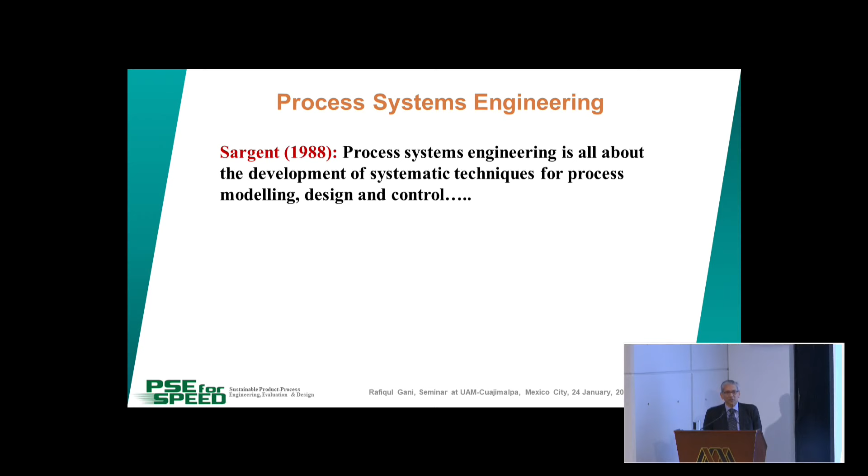So one of the main roles of process systems engineering is how to understand the system and represent it mathematically, and then try to find different ways to solve that problem. And solving that problem, gain understanding so that one can understand and find better solutions for the system. So it is this what I'm going to talk about mainly, which is this part here.

So first let's see how one solves the problem normally. Almost all the processes that you come across, all the products that you come across are usually made by experiments. So you have a system, you do a lot of experiments on the system, and then after some time you find one experiment that satisfies all your requirements, and so you say, this is my product, or this is my process. So it works because you have all the chemicals, all the products that you get.

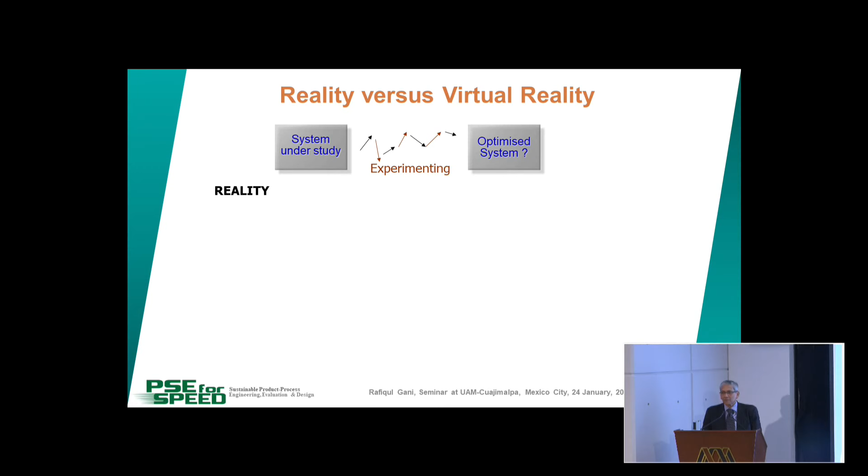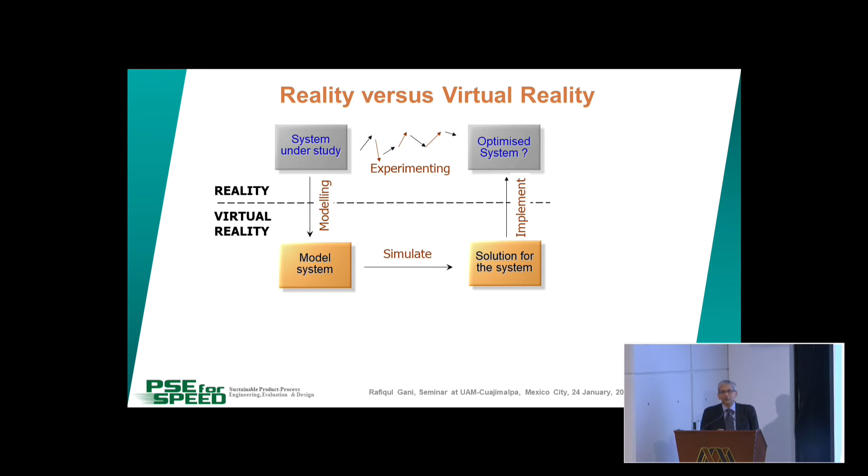But the question is, is it the best? Can somebody find a better solution? That we cannot guarantee, because by this experimentation, it's not possible to say that this is the best solution. So what happens if we then say that for this system, we will make a model for it, and instead of doing the experiment, we will do the virtual experiment. Can we find a better solution?

What we would say is that if the model is representing the system, at best you will find the same solution, but much faster. Because it takes a lot of time to do the experiment, you can do this virtual experiment much faster. And maybe you can look at more alternatives. But basically you will find a solution which is within this system.

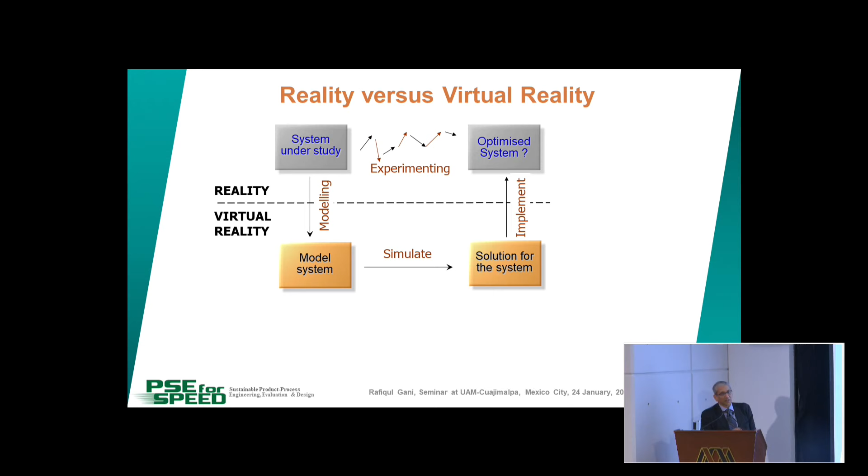But what we want is new innovative solution that can go outside the system. And for that, we would need models that are predictive, that can extrapolate from that system. So unless we have those extrapolation predictive models, just making the model and doing a simulation is not going to give us the solution. It will just help us with the time and cost, but not the best solution. So we have to do something more to get the better solutions.

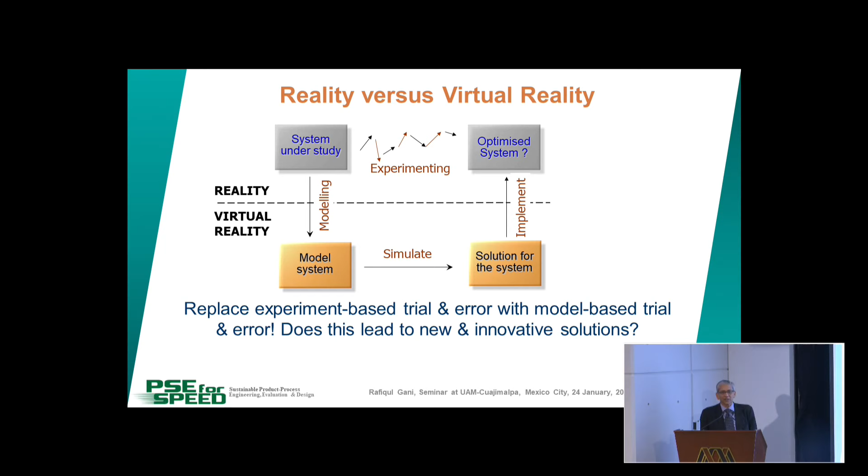So with that as the background, let's look at why we need the innovative and more sustainable solutions. So whether it's chemical engineering or mechanical or biochemical or pharmaceutical, the first step we do is we identify some resources, feedstock, and we convert this feedstock to our product. But in order to do this, we have to use energy, we have to use water, we have to use many other chemicals, utilities. And what is the effect of it?

The effect of it is that we impact the environment, we cause global warming, we pollute the air, and we produce a lot of waste. So we can get our product we want, we can have the process, but the effect is this. And if we take all the processes that we have on Earth and represent that with this factory here, all the manufacturing systems on Earth, and we put all the resources we have in this factory, what we will get is about 25% conversion.

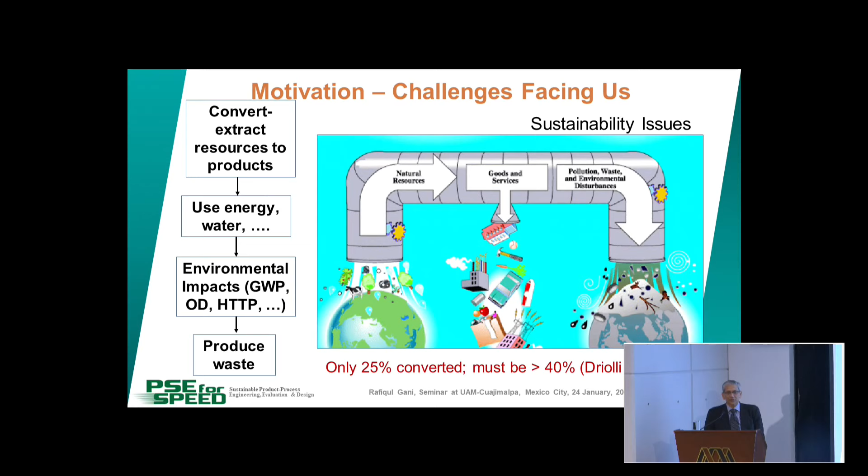So we can at best get 25% of the resources into useful service. 75% is waste. That is the current situation. And if we continue like this, very soon we will not have any resources and we cannot get the product we want. So the processes we have have to be improved by more than 40% compared to the current in order for us to be sustainable. And so that is the question, how do we find the new innovative solutions that are much better than the current ones?

And now we can see what happens in chemical, biochemical, or pharmaceutical processes, and where the energy utility requirement is coming from. So here is our manufacturing process. We put in our resources, we get our product, and at the same time we get unwanted product, which can be carbon dioxide, which can be other gases that go out.

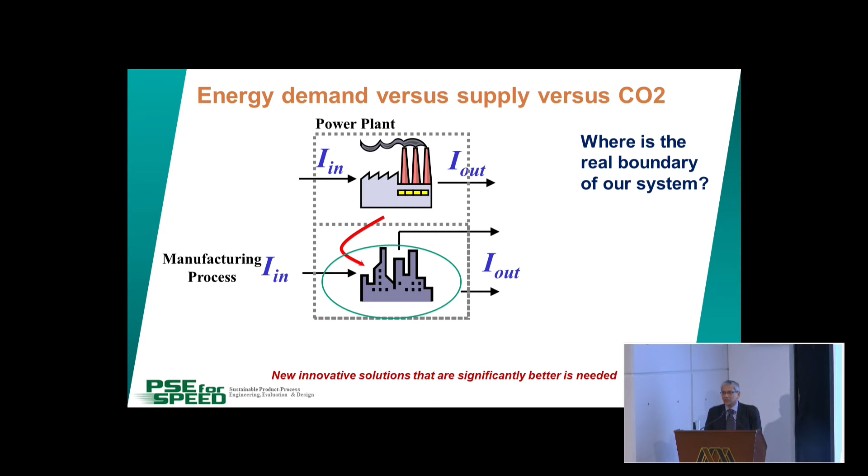At the same time, in order for this process to run, we need power in the form of energy that will come from a power plant. And in the power plant, we put energy sources and we get the power, plus we get greenhouse gases like carbon dioxide and others. So whatever we want to make, we get our product, but we get a lot of unwanted gases and other products that go out, and that causes problems for our environment.

And so that also is a problem, and we can see that this is a utility or energy demanding system, and this is an energy utility supplying system. So we need this supply in order to run this process. Now, can we reduce these emissions here?

We can if instead of fossil fuel, we use solar, wind, nuclear, bio, and convert all of these resources into the power we want. And the advantage is that if we can use these, then there will not be any emission. So one thing we should be looking for is not just the process alone, but combine it with the energy sources, so the total emission will be zero or negative. And if we can do that, we can solve a lot of problems.

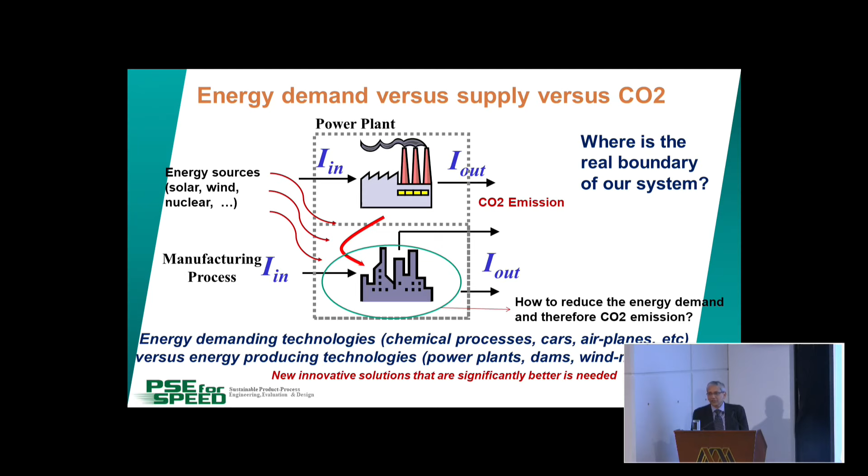And what you will see is that in order to get these kinds of solutions, the tools and methods that we have now cannot give us the solutions. We have to look at other tools. So what we want is new innovative solutions that are significantly better. So then two questions can be asked. Can current simulators, methods, tools solve the problems we are interested in? Because people say, oh, we have Aspen or we have PRO/II or HYSYS, we can solve all these problems.

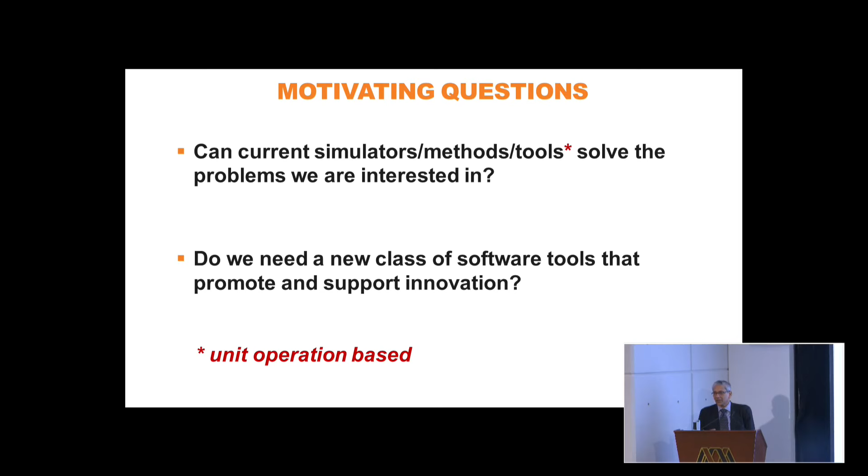And do we need a new class of software tools that promote and support innovation? As I've shown you in the previous slides, we want innovation. Can we get innovation from these current tools? All of these tools that you see here are unit operation based. Well-known unit operations: distillation, reactor, heat exchanger, all of these. Okay?

So let us see the current situation. For those who are in chemical engineering, you would know this as a process flow sheet. If you know this process flow sheet, you can enter its details into any simulator and do a rigorous simulation. That means given a flow sheet, its models and its design, you can perform simulation, mass balance, energy balance, and it will give you all the information you need for that process. You can also do optimization and control.

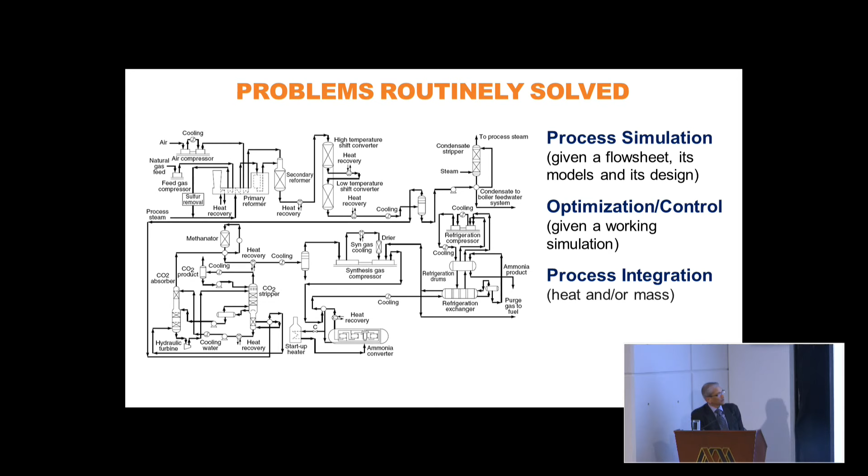If you have a working simulation, you can do process integration, combine the heat exchangers, mass exchangers, and analyze. If you have a simulation for all the streams, you know all the temperatures and compositions, you can calculate the cost and do life cycle assessment, sustainability factors, all of these things. But in order to do this, you need external tools. The simulator is not giving you those. Okay? So this we already can do, and I think in the courses you take here, you learn how to do that also.

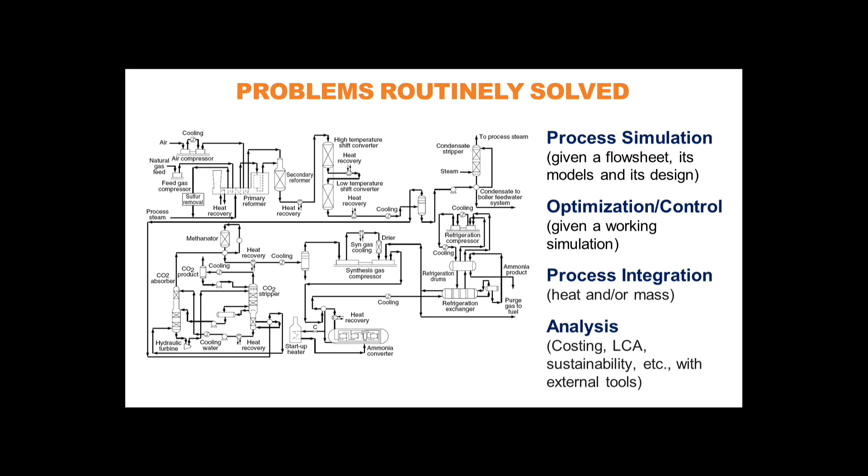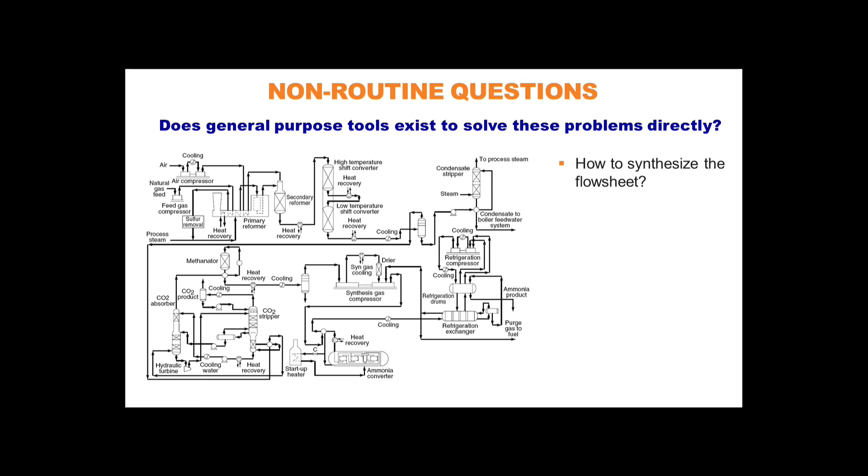So now let's have the same flow sheet here and ask this question: how to synthesize the flow sheet. If somebody has given us this flow sheet, then we can do all the things that I showed. But how do I get this flow sheet? Who will develop it for me? And how do I know that this is the best? We come back to the same question: somebody has done some experiments and came up with this flow sheet, and so we can do everything. But how do we know that this is the best?

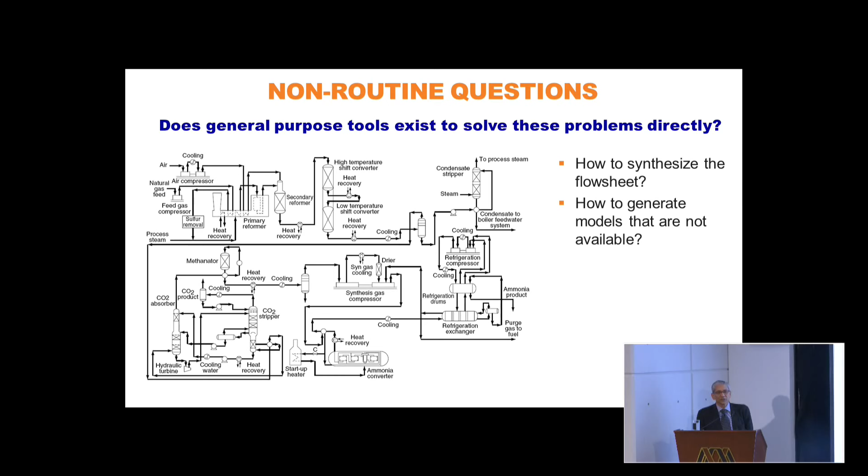Or if we need some special models for the reactor, for the separation, how do we get those models if they are not in the simulator? Because we are making a totally new process, and if we make a totally new unit operation, how do we get the models?

Or how do we design the equipment and operation? Because the simulator does not tell us what would be the number of stages in the distillation column, what would be the feed location, what would be the reactor temperature, pressure. It says, if you give me the reactor temperature, pressure, I can tell you what is the conversion, what will go out. But somebody has to give me that information. And how do I find that information?

And finally, if there is a reactor, we need catalysts, enzymes, and so on. If there is separation that is difficult, we may need solvents. How do we find all of these things? If we give them to the simulator, then it's no problem. But how do we find them? And how do we know that is the best? So these are the questions, but obviously people have solved this. But what you will see is that the solution is trial and error and not very efficient.

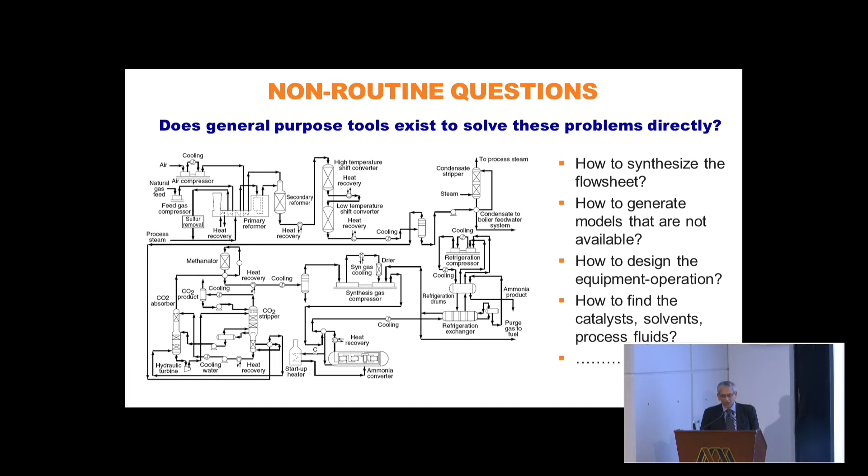So what I say is that there is an inner loop and an outer loop. So what we have is this is the process and we can experiment with this. So if there is a reactor and we have 5 different catalysts, we can check which catalyst is the best. So then we put one catalyst, we perform the simulation, we see what is the objective function. If we are satisfied, then that catalyst is good. If it is not, we try again. So whether we want to find a catalyst or solvent or equipment design or even flow sheet, we have to do trial and error.

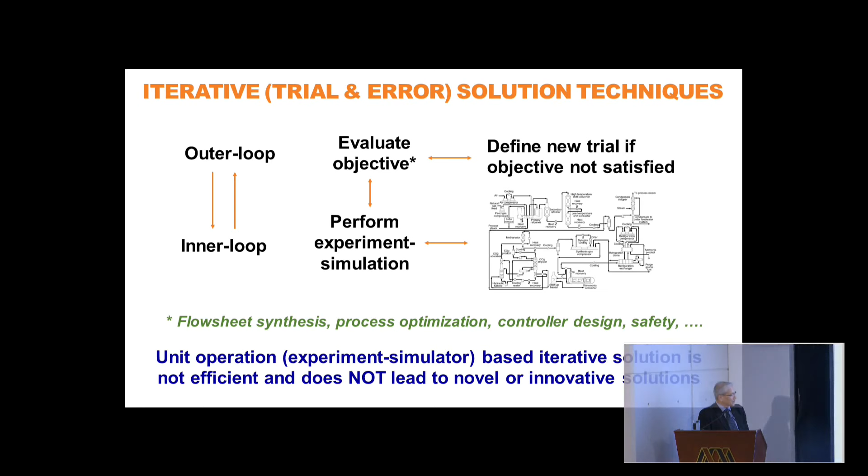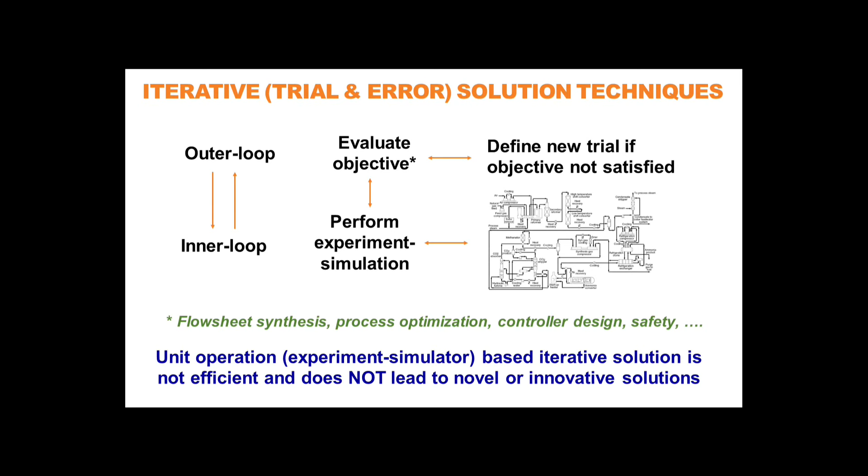And if we do trial and error, then we cannot expect to get a new innovative solution. We can get it accidentally, but not from a theoretical basis. So that's why flow sheet synthesis, process optimization, controller design, safety, all of these we can do currently in this form, and it can give us a solution, but not necessarily the order of magnitude improved solution. And if we are working with unit operations, then we know all the unit operations that are there, and we have to use them. So it cannot give us a better solution if we just have to work with the unit operations. So now we can see that if we can formulate these problems mathematically, then maybe we can find some solutions that will not require this inner loop and outer loop trial and error.

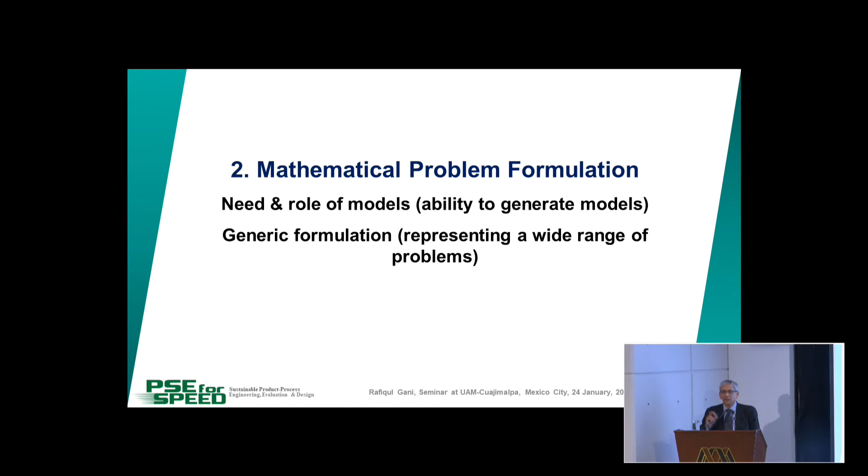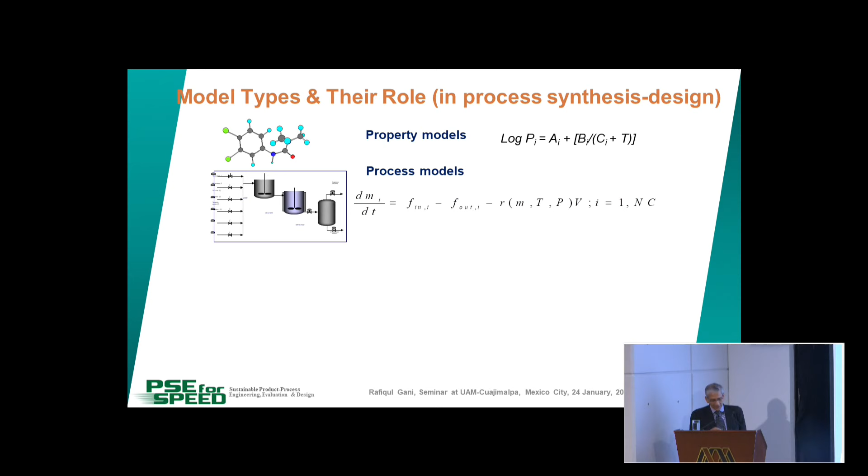So first we need to see that we are working with chemicals. So here is, for example, a chemical that we want to make. We need to know all the properties of this chemical. Then this chemical would be produced in a process. Then we need the model of the process. And this property model will be inserted into the model of the process. And that will be the process model together with the property models. And this is typically what the process simulator has: the process model with the property models.

But if we want to do everything that I talked about, we need more models. We need to know how to operate this, so we need an operation model. We need to calculate the cost, so we need a cost model. Then we need to check whether from an environmental point of view it is good, so we need the environmental model. And we also need to check the sustainability, so we need a sustainability model. All of these are extra models that we need to have together with the process simulator.

That is still not enough, because once the product is made, and maybe the product is not a single chemical but more than one chemical, we need a formulation model, how to mix the chemicals together to make our product, which is multi-component. And then after we have made all of this, will the product work? So if our product is a paint, which is not one chemical but several chemicals together, does the paint work? We can put it on the wall and see if it works or not, but can we, before selling the product, know all the properties of that paint? Then we need a model for that paint, and together that will be the total model we want to solve. And only this kind of model can give us the overall solution that we are looking for.

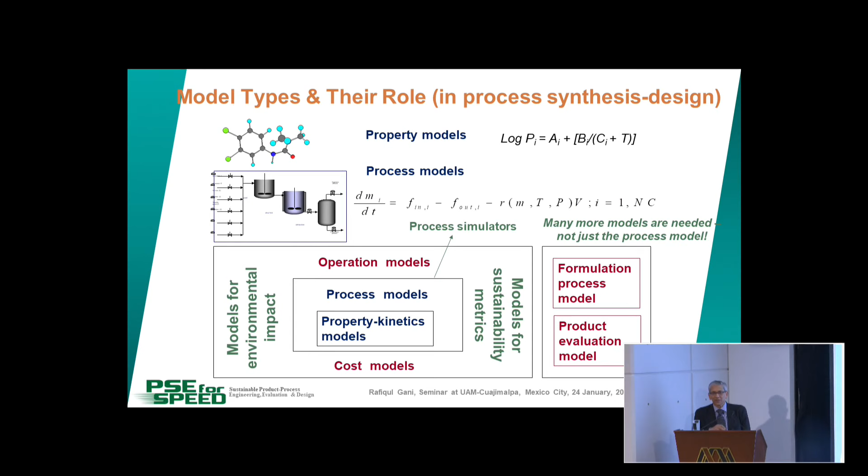So let's see then how we will tackle this kind of problem. Because process systems engineering tells us whatever the problem is, if we can understand the system, we can find ways to solve those problems.

So first, there's not going to be too many equations, just a few. This is the generic representation of the problem that I showed before. All these models in a generic way can be shown here.

First, we want to have an objective function because we want to minimize the cost. We want to optimize the operation. We want to take into account environment and sustainability. We want to take the safety and hazards. We can add as many terms as we like. So that's an objective function that we may want to minimize or maximize.

Then we want to put some constraints on the process. We don't want to make any chemical, but we want to make the chemical at the highest purity that we require. So that's the process constraint. Then we have the process model, as I showed you. If we are going to find a process, we need to have a model for the process.

And then the property, the chemicals that are handled, they need to have property. Then process variable constraints, like what can be the upper and lower bounds of the temperature, the pressure, all these things. Then the molecular structural constraints, that could be what is the catalyst, what is the solvent, can we define them in terms of chemical structures. And then finally, what kind of process connections, unit operation connections we will allow or not allow.

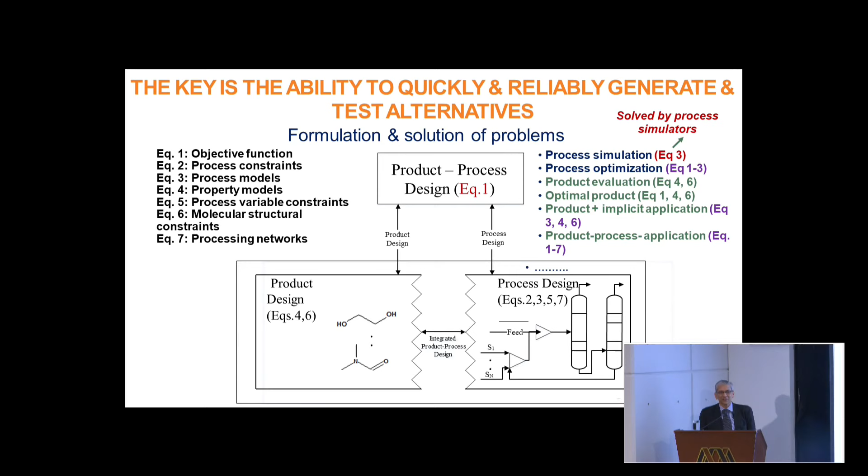The objective is that a wide range of problems can be solved, and since we are talking about new innovative solutions, we are going to show that these solutions will be better than what we have currently. So let's say that currently we have this reference, and this can be any current process or reference design that we have for a new process.

But we can pass this through a test to see whether we can improve it further. So we have the reference, and we will take 3 sets of variables: one related to cost, another to environment, another to waste and resources. What happens if we reduce the cost, reduce the carbon footprint (that is the environment), and reduce the waste? The effect is that we will make more profit, we will improve environmental health, and we will have more resources. So here already you can see that if people say in order to find a better environmental solution you have to pay for it, you don't have to - if you can find solutions where the carbon footprint can be reduced, at the same time the cost will be reduced.

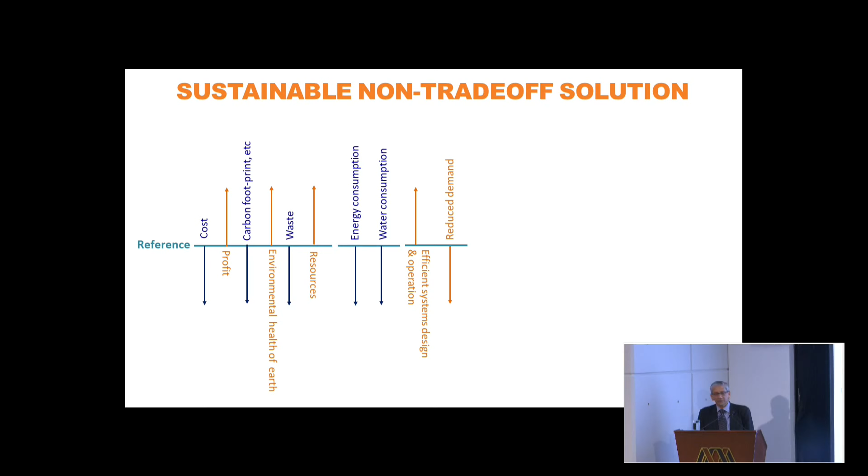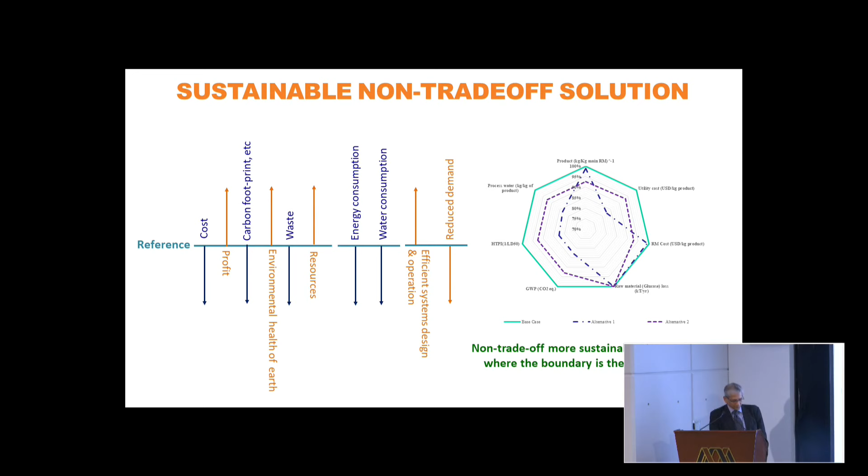So we need a method that will do this for us. What we have developed is a 3-stage method. The first stage is synthesis. What it means is that if we do not have a process flow sheet, we will solve the synthesis problem. If we have a process flow sheet, we can skip the synthesis and come here. If we have an existing process, that means it has the flow sheet, it has the details of the design - we will come here. But first, let's see the synthesis process.

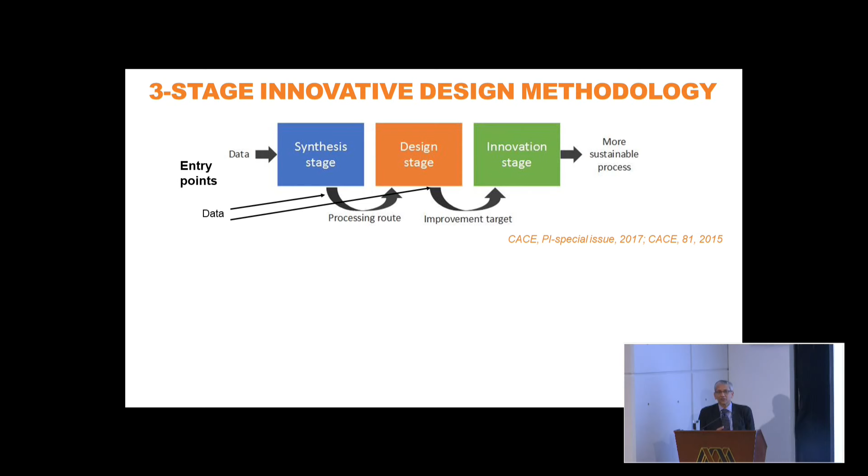Entry data is: we have a chemical, we have a feedstock, and we know how to convert that feedstock to some chemical we want, but what is the process? And is the feedstock we are using the best feedstock? All of these things we can study in the synthesis stage, and that will give us the optimal processing route.

Once we have the processing route, then we will complete the design of that processing route. We will analyze the process, find out where the weak points are. That means: why is it costly? Why does it use more energy than required? Why is it wasting some useful raw material? We will analyze this and set targets for improvement.

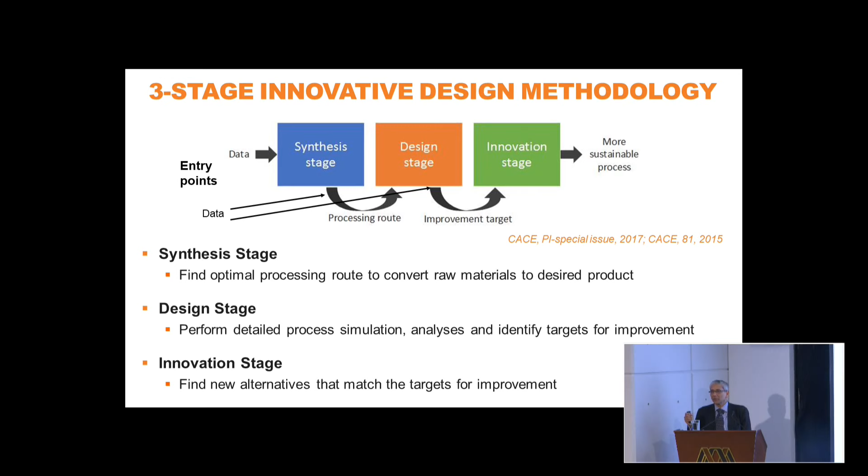And once we set targets for improvement, that means targets for improvement would be to reduce the demand. Then, once we have set the targets for improvement, in the innovation stage we will try to generate alternatives that match the targets. If they match the target, by definition we will find better alternatives than we currently have, and by definition it will be more sustainable. Okay, so this guarantees us the new innovative solutions. Afterwards, we will see whether it gives us the global optimal solution, or whether that is even necessary.

How can we find that?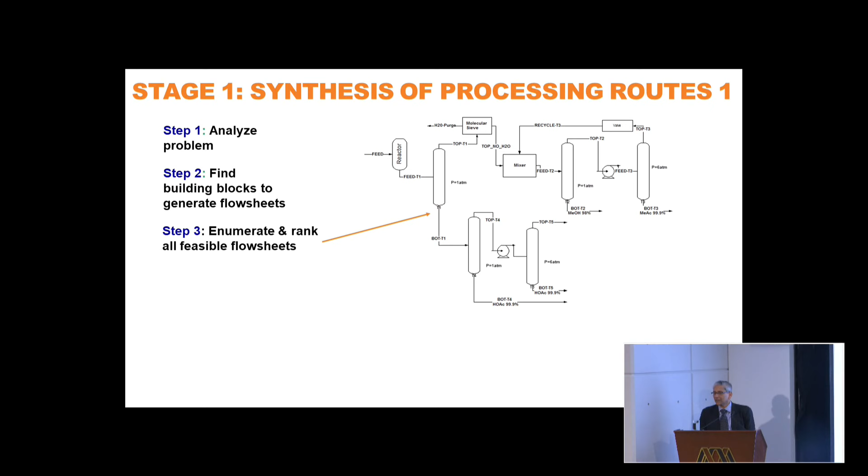So here is an example, one way to combine: we have a distillation, molecular sieve, pressure swing, and 2 distillation columns. This guarantees us the product we want. Is it better than any other? And how many can we generate? In practice, for this process, we have generated more than 300. In the literature, you can find only 4 or 5.

So among the 300, these 4 or 5 are there, but which one is the best? So we can do some ranking to find out which of these generated flow sheets will require the minimum energy, will have the lowest carbon footprint, will have the best environmental performance, will require least utilities, and so on. But we do not have time and the information to do the rigorous simulation. So one has to generate a new class of models that can do these things very, very fast, and we will see that afterwards.

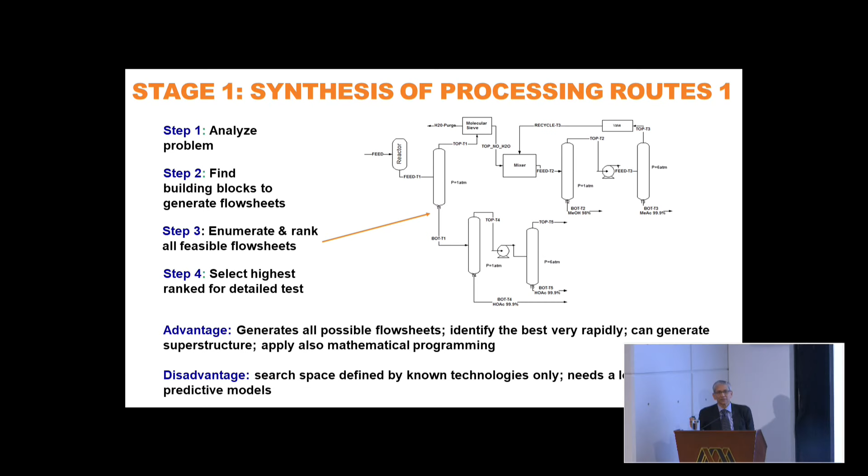So without that, you have to do the process simulation or experiment. Let's say we have done this and we have come to a process flow sheet. But this is not the only way. We can do it also by what we call superstructure optimization. The difference between this and the other approach is that the other one is called generate and test — we generate flow sheets and then test each of them, not with rigorous models but simple models, but we check all the possible flow sheets, so one of them has to be the best. Here, we do not have to look at all the possible flow sheets. We generate the mathematical model for the problem, and then through optimization, we find the best solution.

How does this work? This is also a very common problem for biorefineries and others, so I will give the example of a biorefinery. Let's say we have these 5 biomasses, and we have identified that from these 5 biomasses we can make any of these products — ethanol, succinic acid, lactic acid, all kinds of products. But which biomass should we use? Which product should we produce? One or more? That will give us the best profit and satisfy all our requirements.

So then we have different processing steps. Let's say this is the pre-treatment — there are 6 alternative ways to do the pre-treatment — and then the hydrolysis, and then the fermentation, and then the separations. But in each step, we only have to use one technology; we cannot use more than one. So then by optimization, we want to find out which is the best processing route. Let's say this would be the processing route: we take this feed, go through this step, this one, and then we end up with 2 products. We can have a single product or a blend of products, and that combination will satisfy all our requirements.

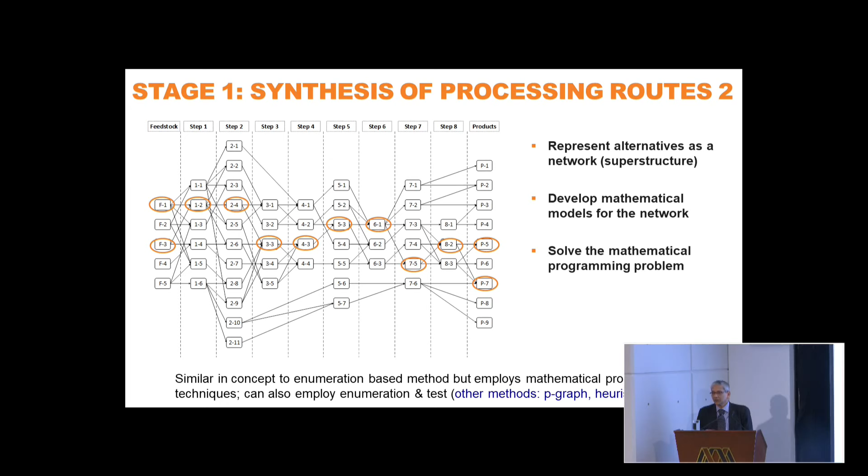So how do we solve this problem? As I said, this problem may require as little as 7 equations and as many as more than a million. So we want help with the computer to formulate and solve this problem.

So we have a tool called Super-O, that is superstructure optimization, and it's an interface. This interface will help the user create this network. Once the network is created, the user selects what is happening inside each of these boxes, and that is done here. Once they select what is happening inside this box, there's a corresponding model library for each of these box operations, and we will get the model.

The model will have more variables than equations, so we will need to specify some variables. We have a database that will help us specify the variables. Those variables can be the composition of the feedstock, the price of the feedstock, the price of the utilities, all of these things.

Once we give the data and the model, then we have the total structure. This program will write the GAMS code, that is the optimization code, and call GAMS, the solver, for the optimizer, and then we will get the solution. So the user has to define the network, select the models, and almost everything else the system will do. And so we can solve the problem very fast, and we can look at many alternatives.

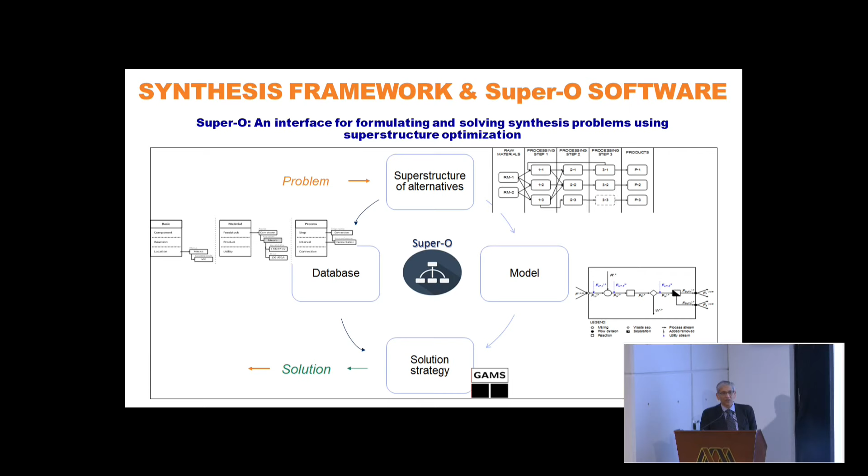So if we have this flow sheet and the design, all the details that we need, temperature, pressure, conversion, number of stages, feed location, everything, we can perform the simulation. Once we have performed the simulation, we do the analysis. But we need special tools for that: economics, sustainability, life cycle, all these.

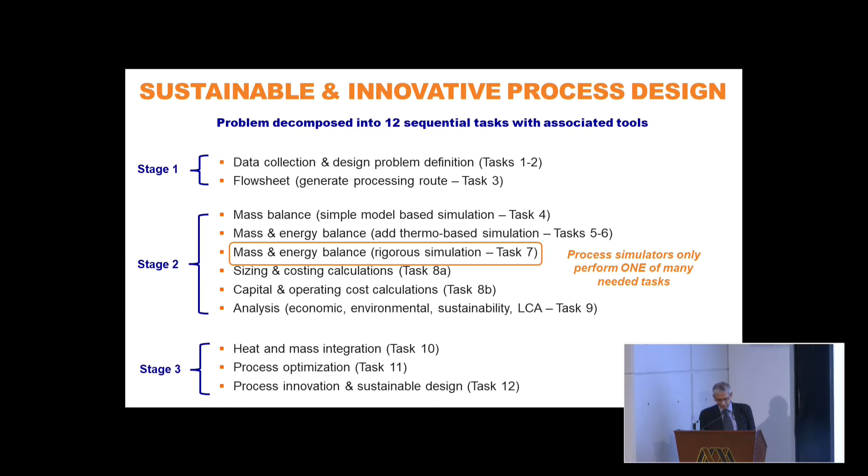And so here is a new developed tool called ProCAFD. Afterwards, if there is time and another room, we can see the demonstration of this.

As I said, you need a lot of data to solve these problems, so we have a library of databases. We do not want to calculate the cost, the carbon footprint, the energy consumption with detailed simulation models. So we have special models that can tell us what is the energy consumption of a process or a process unit operation without doing detailed calculations.

Then with these ones, we need these tools, which we call the synthesis tools. If we do not know the process flow sheet, we generate the process flow sheet. If we do not know the solvent, we generate the solvent. All of these things we do here.

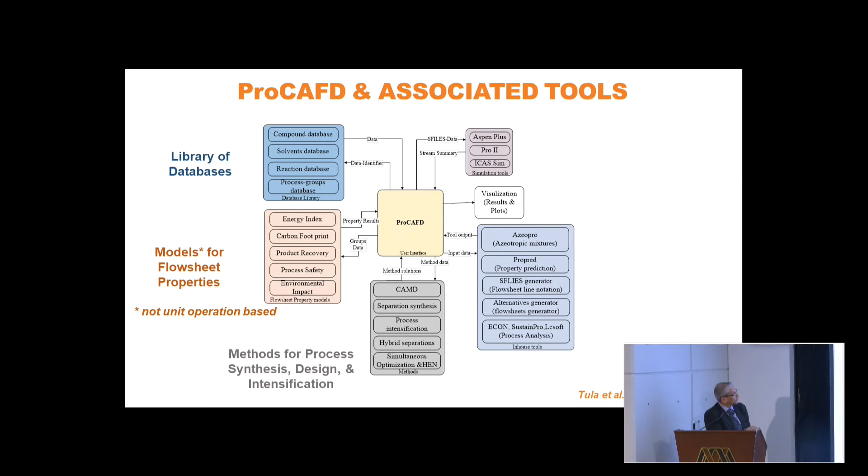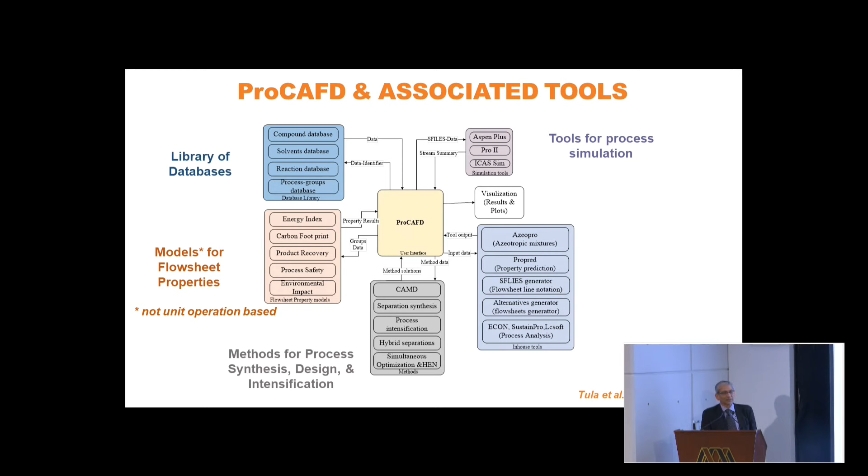Then, if we are able to do all of these, we can then go to the process simulator, and here it can connect to other simulators, external simulators like Aspen Plus. This is our own simulator, and in principle any other simulators. And you don't have to, that is the user does not have to write the input file for these simulators. The program will do it for them. So you can think of, if you have done a process simulation, how much time it took you to make those input files before everything was ready. Here you will get it immediately.

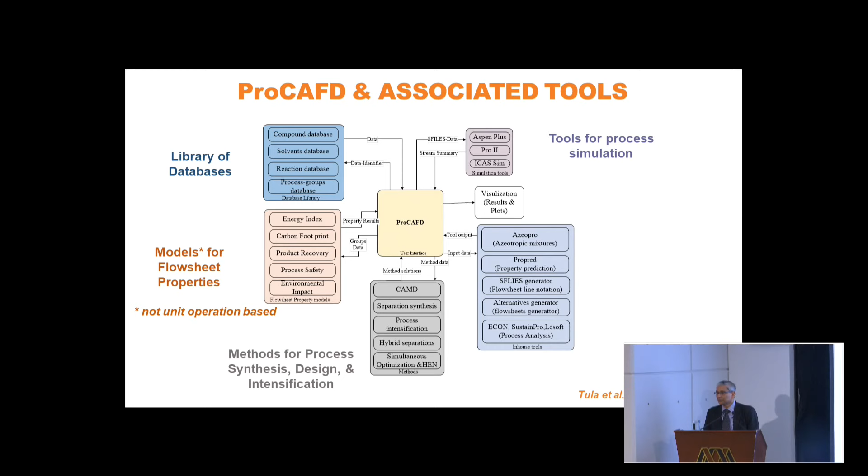And once you have the simulations, then you need all these analysis tools. So that is the new kind of tool that we are talking about, and I will show you how it can be configured according to your requirements.

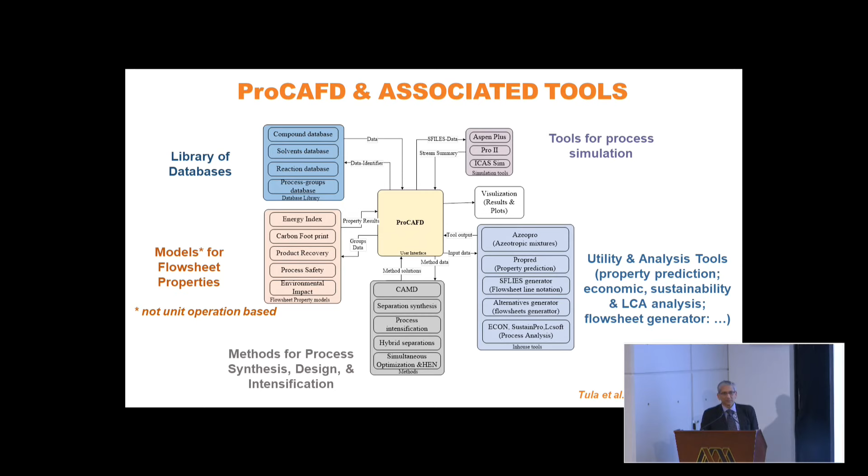So now we come to the third stage, that is the innovation stage. We have the target, and what we want is a new flow sheet, a new process that is better than the current one. So in this way, we can think of that this is our flow sheet that we have found, our reference.

What we will do is break this flow sheet down into unit operations, then the stages of the operation, then what we call simultaneous phenomena building blocks and phenomena. That means after this we cannot break it into any smaller pieces. This is the same as if you take a molecule, break it down into a group of atoms, and then you can go to protons and electrons and so on. But after a certain point you cannot break it down anymore. So that is what we have done.

We have taken a process and broken it down into all the phenomena that happen. And what is a phenomenon? Phenomena are heating, cooling, mass transfer, heat transfer - these are different phenomena. Once we have these phenomena, we say: combine these phenomena together and try to find a flow sheet that matches all the requirements of this but is better than this.

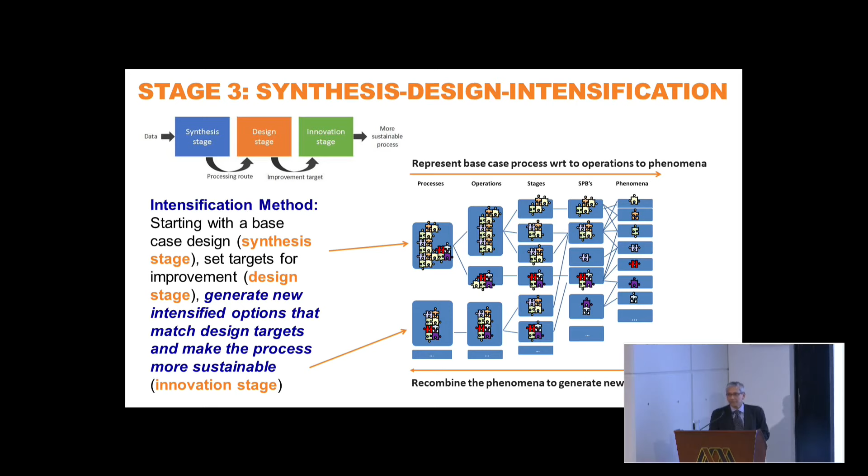So here is an example. It is actually the same process that we looked at before. Methanol plus acetic acid gives us methyl acetate and water. That's happening in the reaction. Eastman Kodak built this process in the 1960s because they didn't know how to make those separations easier. The one I showed you is better than this.

Okay? But some clever engineers at Eastman Kodak worried about it because there were problems in different parts of the flow sheet. There was too much energy here and there was loss of acetic acid from some of the streams with the product. So these were not good. And they started looking at it and came up with this solution, which I showed you, even better than this one. That means all of this is in here, in one equipment.

Now, how did they find out? They were clever engineers. They started analyzing and then ultimately came to this solution. They convinced the company to build the equipment and found out it works. But if we want a solution like this for another chemical process, how do we do that? Do we depend on some clever engineer for another 20 years to give us that? No. Can our method that I showed you give this? If it can, we have a way to get to these solutions. Okay?

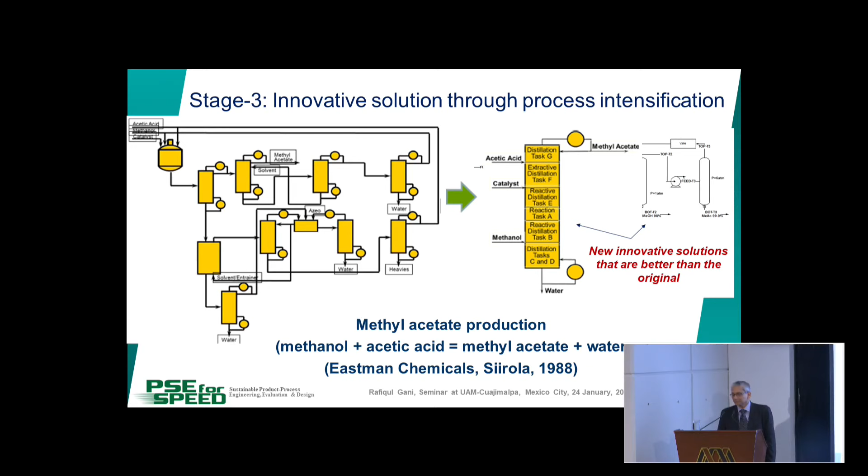So another thing, if there is time during the demonstration, I will show you how we can get that. Okay? And we also talked about energy, that we have to reduce the energy demand of every process. Chemical processes are characterized by high energy consumption. And within the chemical process, distillation is using the maximum energy. So of the chemical process, 80% of the energy is used by distillation.

And what we can see is that even though you find distillation in almost all chemical processes, even biochemical processes, pharmaceutical processes, is it the best separation from an energy point of view? It turns out that if we look at this plot, where this is the purity of the product against the reboiler duty, as the purity of the product increases, the cost of the energy increases. Up to this point, point A, it looks like distillation is the best. You can do the separation at a very low energy cost.

But when you want to go from this point A to point B, all the remaining energy is used to go from here to here. That cannot be very good. Can we replace this part by some other means that does not require this energy? If we can, we have found a very good solution to do our separation. We still want to reach this product purity, but we use distillation up to here, and then we switch to something else.

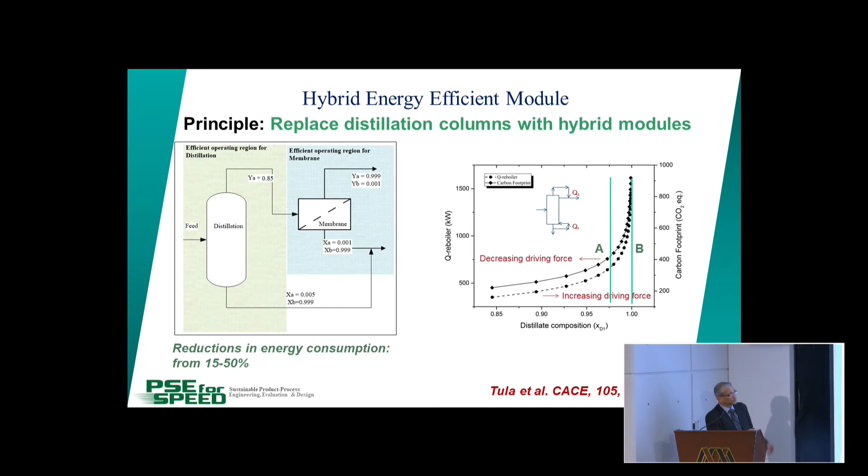And here is an example of that. Here is the distillation column. We want to achieve 99.9% purity, but we go only up to 0.85 with distillation. And then we send it here, and now it is 85% A, 15% B. With the membrane, we do the opposite of what people are doing. We take B through the membrane. The more B we take out, the more A will be pure. And this will require very little energy. And then we would save a lot of energy in this part by using this scheme.

It does not have to be membrane. It can also be adsorption. It can also be solvent-based separation, as long as we can find a way to replace distillation for this part. And this is a solution that people have not looked at, because people think that they have to replace the distillation totally. It's not that. You can use distillation up to here, because you cannot use membrane from any point to this one. It has a limitation of flux. Adsorption material needs to be regenerated, solvents need to be recovered. So if it is a small separation, then they become very feasible.

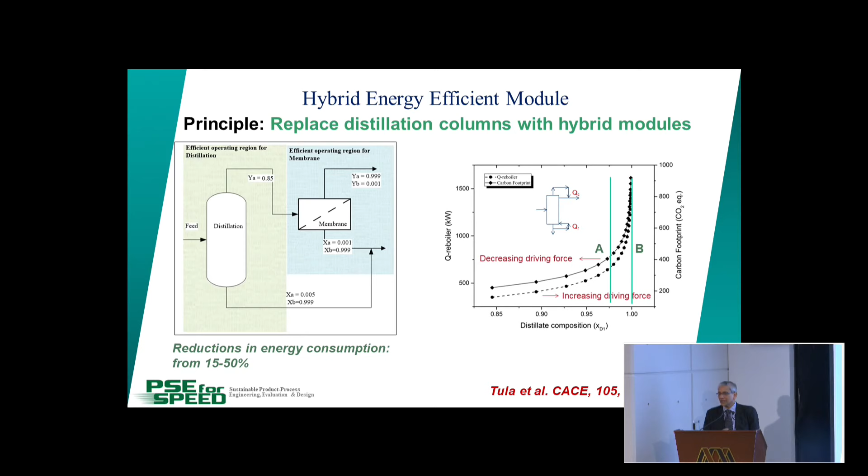And then you can think of, can we find a better separation technique than distillation? It turns out at this moment we don't have, but we are using distillation all the way to point B. We do not need to use distillation all the way to point B. So also I can show a demonstration of how this can be calculated.

So now let's see what kind of new software we can make to solve this kind of problems. So one thing we can say is that when you have your simulators, they have a lot of features that you don't need. You only need a small number of things, and all the other things you don't need. So can we customize, tailor-make? If somebody wants a specific thing, we can make it for them. So this is how we do it.

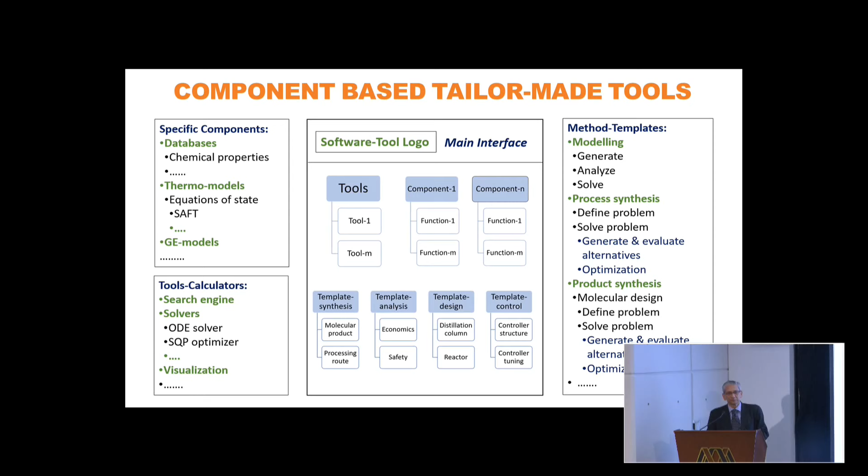We say, okay, there is a main interface. There are different tools, tools for synthesis, tools for design, tools for modeling. And within each of these tools, there are sub-tools. These are different, let's say, software. And some of those tools can be a template for synthesis. We can make a molecular product. We can make a processing route. We can do economics calculation, safety, and distillation column design, reactor design. These are different templates. Okay?

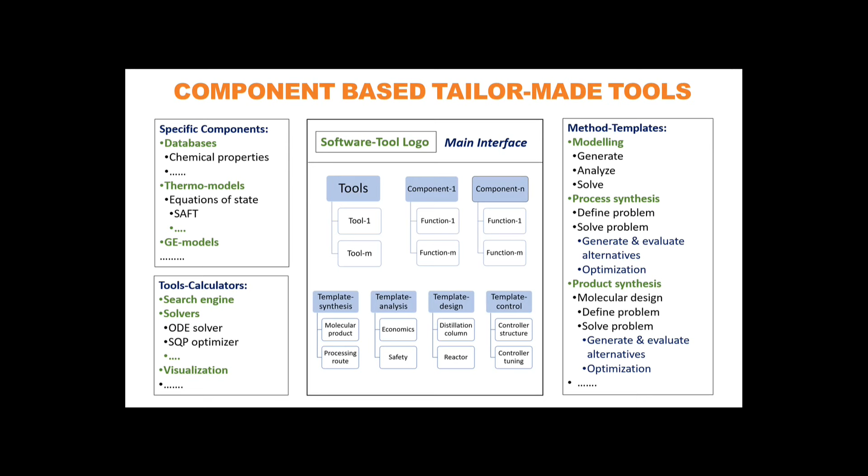And then we have libraries of databases, of thermodynamic models, calculation routines, different modeling techniques, synthesis techniques, design techniques, and all of that. So if we have all of that in different forms, ready to be combined together, then we can say that if we want, let's say, a tool for process synthesis and design, we start with the template for synthesis. And there are two templates. One is synthesis of molecules, synthesis of processing routes.

Since we want processing routes, we take this template, and then there are three ways to do it: heuristic, process group, superstructure. We take this. From here, we get the processing route. Then we go to the design template, which is based on unit operation, and then we go to distillation, reactor and so on. So then it will give us, like this, all the tools and the corresponding associated methods and tools. We need to make a special tool for synthesis.

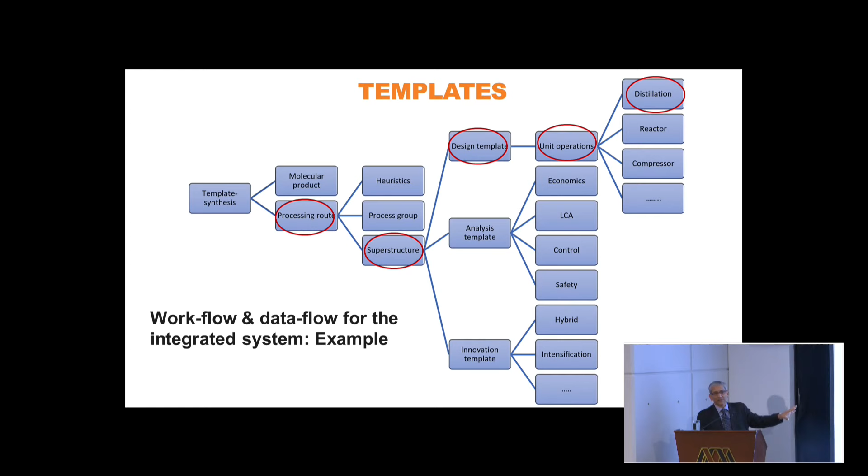And here is how it will work then. We have all these libraries. We want to develop a new tool, and then we find out what kind of tools from the library it needs, and then we find out what kind of components they are connected to, and once we connect them, we have a new software. And it's plug and play. Just like equipment, you plug and you use it. It is like that. You don't need any extra programming to do it.

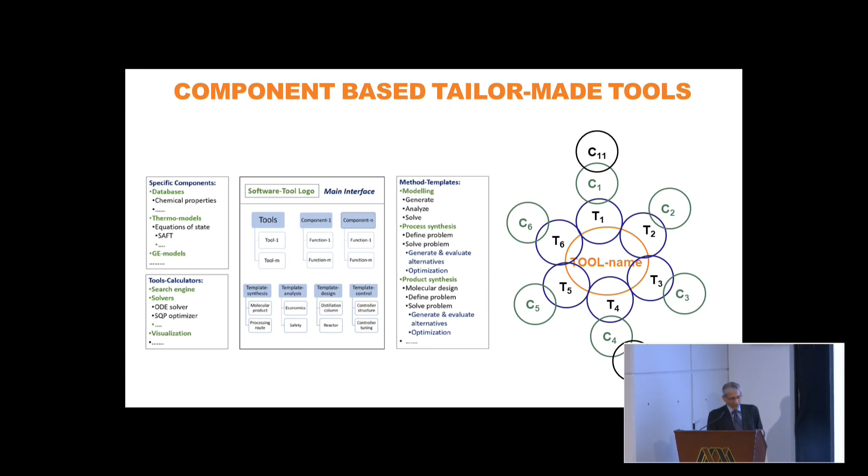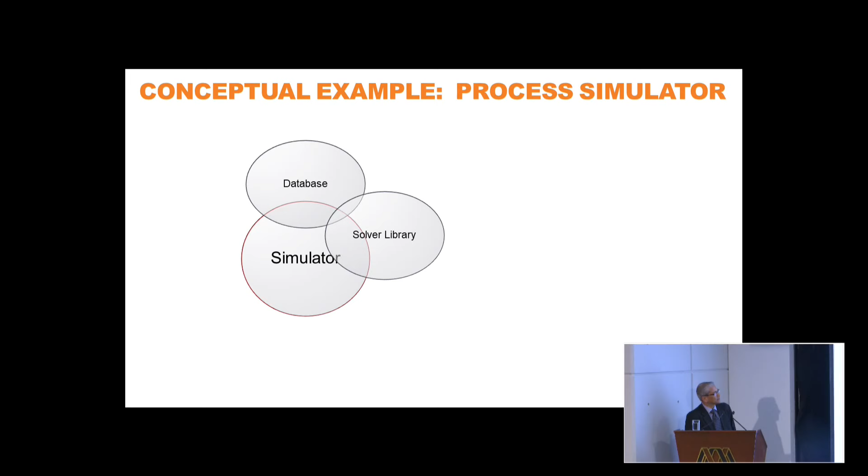So here is an example of that in terms of the simulator. What does the simulator have? Database, solver, model library, flowsheet representation system, thermal library. And then the database may include these things and so on. Okay? But as we have seen, is that able to solve all our problems? No, because it cannot generate a flowsheet. Okay? So it would need extra tools here.

It does not have all the chemicals, so it needs extra tools there. It does not have all the models, it needs extra tools there. So that's an incomplete structure. In the way I showed before, we can complete it for any specific requirement. New models and so on.

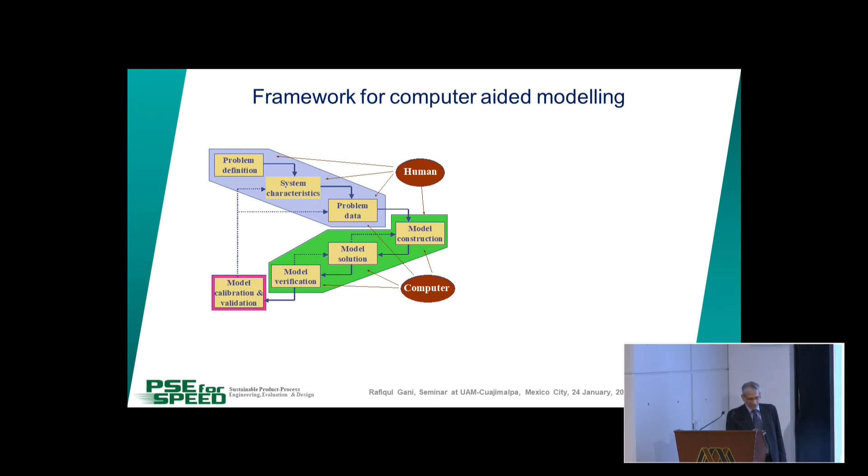So the new class of software, first, I think you people know that very well, is the modeling tool. We don't want to spend all the time writing all the equations, testing and all of that. The human is able to define the modeling problem and give its characteristics, give the problem, but all this part the computer can do for us. And if the computer can do it for us, we save a lot of time in modeling. And once we have the model object, we can use it for any purpose we want. And all these models then will be included in our model development tool.

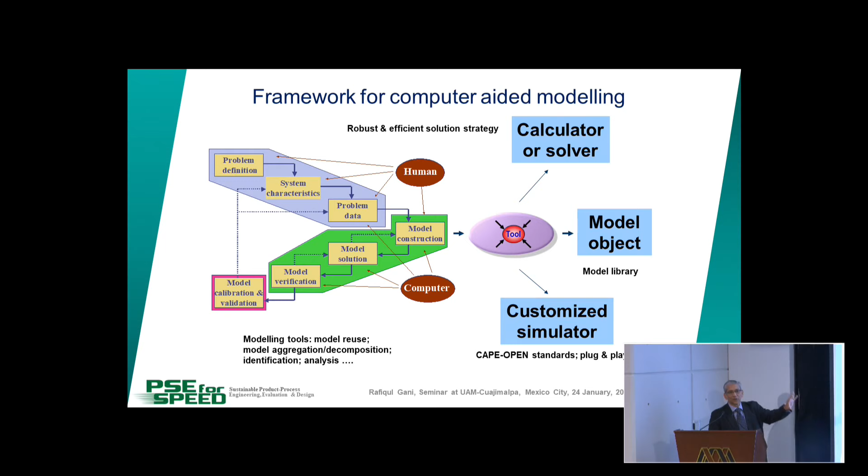And here is the ProCAFD that I showed before, where we want to do the synthesis, the simulation, design, innovation, all of that in here. That's how the interface will look like.

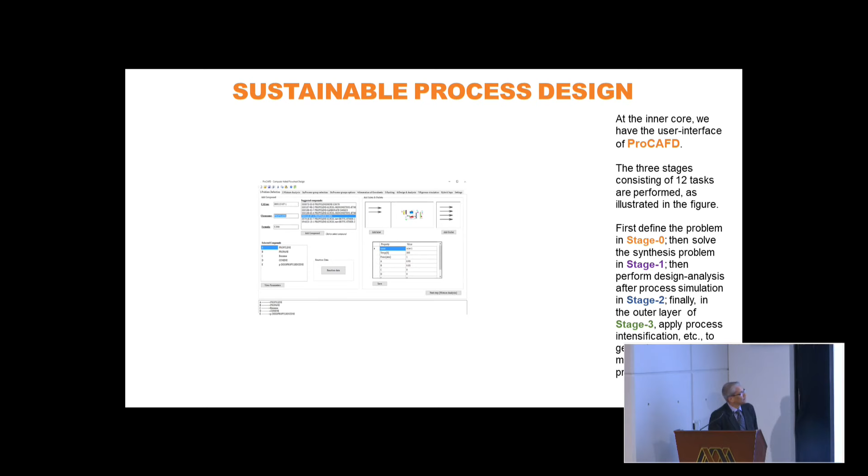And at stage 0, we define the problem. How do we define it? We say we have 2 inlets, we have 4 outlets, and the inlets have these chemicals, and the outlets have some of these chemicals, and we give each of the specifications for inlet and outlet. And that's all we have to give: what is coming in and what is going out that we would like. We would like to find the process that is the best.

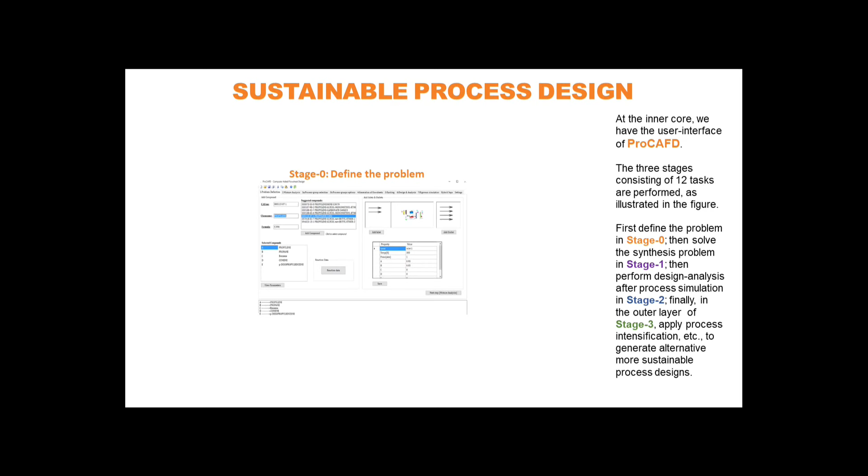So then, in stage 1, we solve the synthesis problem. We collect the data, and if the user cannot give them, the software will generate the data about the chemicals, about the process, and then solve the synthesis problem. Once the synthesis problem is solved, it will go to stage 2. It will do tasks 4 to 9. That is the simulation, then the performance, sizing, costing, economics, and then we'll do the sustainability analysis and identify the targets.

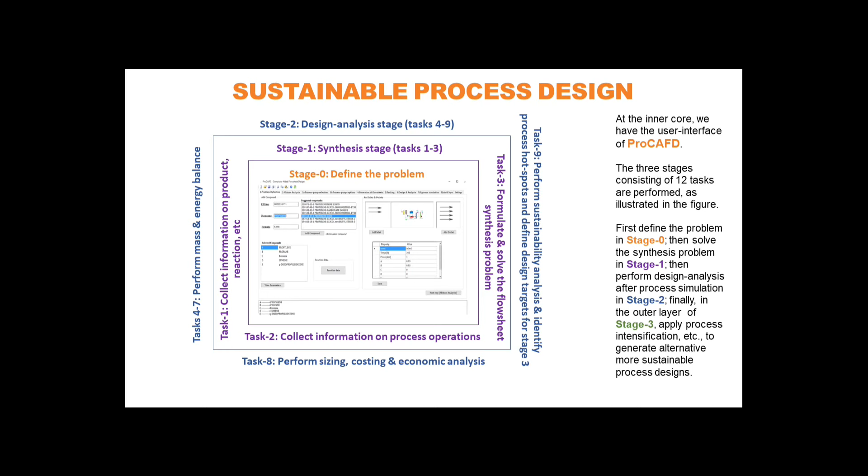And then once the target is done, it will go to stage 3, do the heat and mass integration, perform optimization, perform intensification as I showed. And then at the end, we have a process that satisfies all our requirements. It's interactive, and like that it goes.

How long would you need to solve this? I don't want to give it for education, because it's a totally new process from zero. We just give, for example, propylene and propane and benzene, and we want to make cumene, and it will have a byproduct. All the way to the end, we can solve it in 1 hour. But if you give it to the students, they won't learn anything. Your design course is, what, 6 months? So that will be counterproductive.

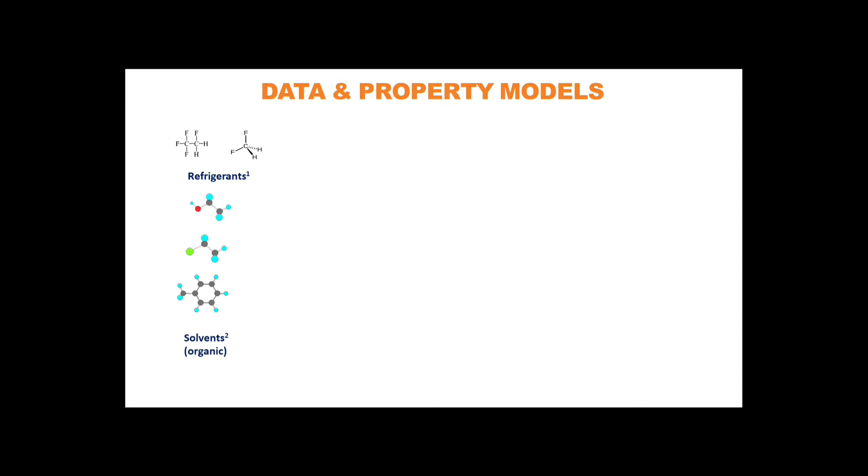But it requires a lot of other things. One is that we can see the range of chemicals that it needs to be able to handle. These are chemicals that we can come across, just a representation of those chemicals. Small molecules, refrigerants, solvents, small active ingredients, pharmaceutical drugs, solvents, ionic liquids, polymers, oligomers, surfactants, lipids. Now, nobody has a process that will make all of these.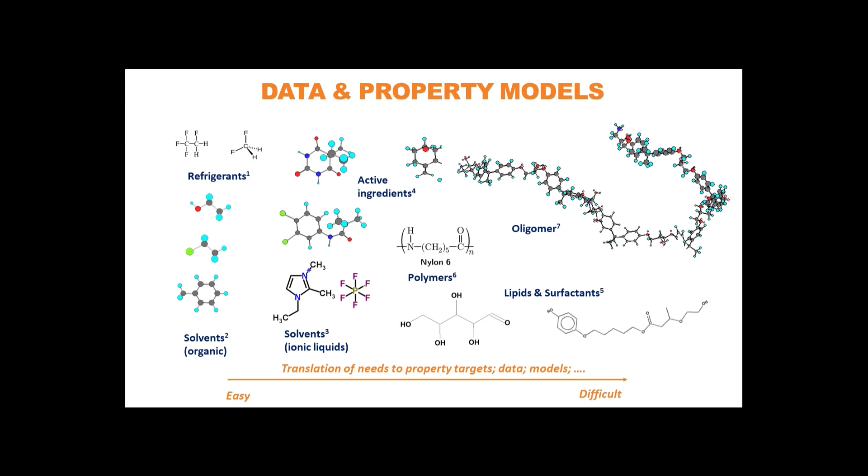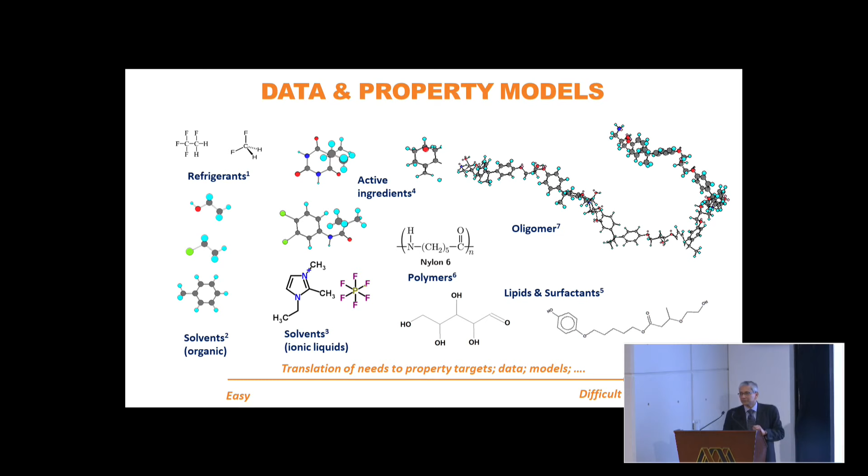Okay? If you're concentrating on these, then you need only these chemicals, these properties. If you're making these ones, then you need some special models. If you're making these ones, you need some special models and special data. So there's no point in putting all of them into one. The customer can say they only want these, and then we will plug in only those tools. So each of these will require their own database, and then we have the database.

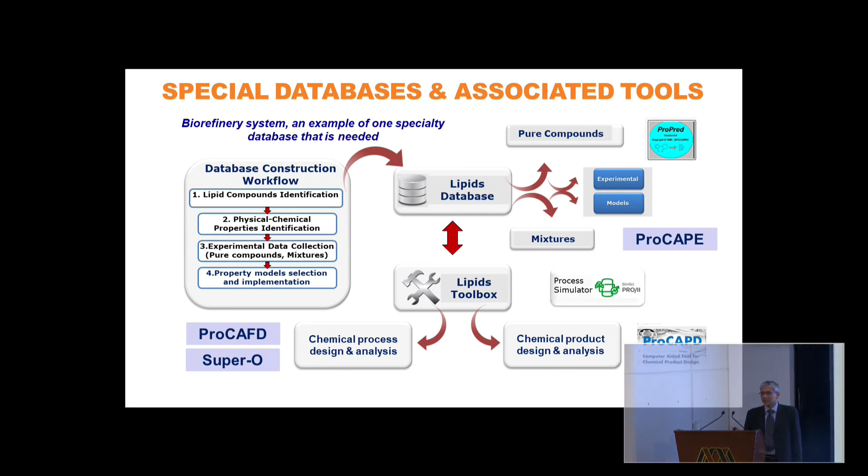This is the example of lipids. And also here I would say that if you're using Aspen or PRO/II or HYSYS, they have a lipids database, but they have a lot of mistakes in it. This is the most complete database that is there, with about 350 lipids, and if you need interaction parameters for the thermodynamic models, all of those are available here.

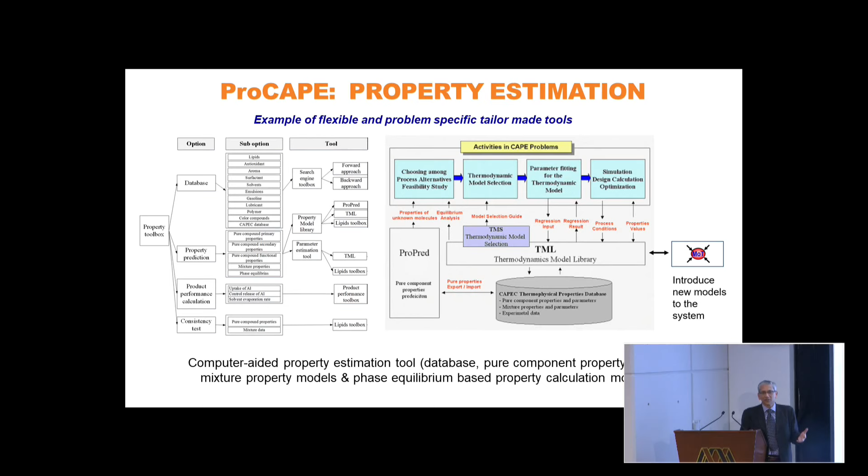And then the database, the chemicals, then need to have the property models. Missing pure compound properties can be generated here. Missing mixture properties can be generated here. Mixing parameters can be estimated through this, and in the end we can have a property model, and that property model will be a component for any of the tools we want to develop. So in that way, for almost any organic chemical you have, whether it exists or not, we can predict the property.

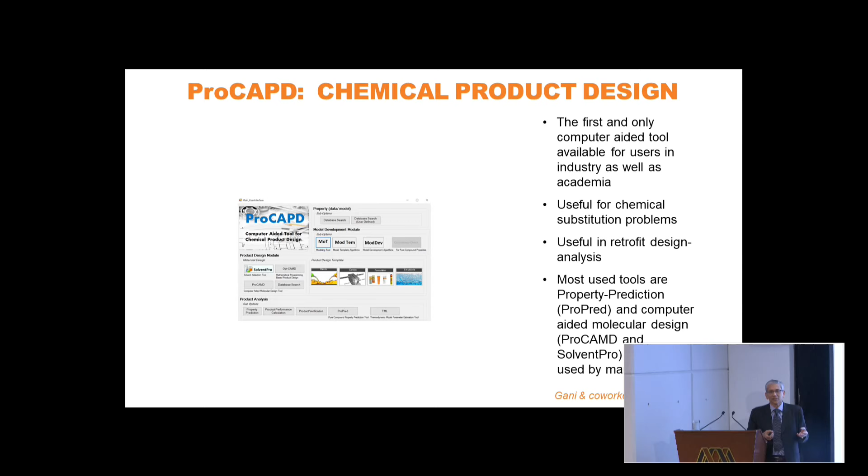So with those property tools, up to now I've talked about process, but can we also do similar things for a chemical product, like a solvent or a lubricant blend or a gasoline blend, or maybe insect repellent lotion or a spray, hair spray, or a cream? Can we make these kinds of things in the same way? So that tool here, ProCAPD, computer-aided chemical product design, will do this. How does it do it? First, what can it do?

It can do single species design, a single molecule like a refrigerant, solvent, lubricant. Functional product design, where a product has a function like a shoe polish or insect repellent, it can do those. Then formulation design, where you mix different compounds together, like if you have a gasoline and you want to add some additional compounds to make the gasoline much better so that the car will run longer, things like that can be done here. And you can also make devices like fuel cells and others.

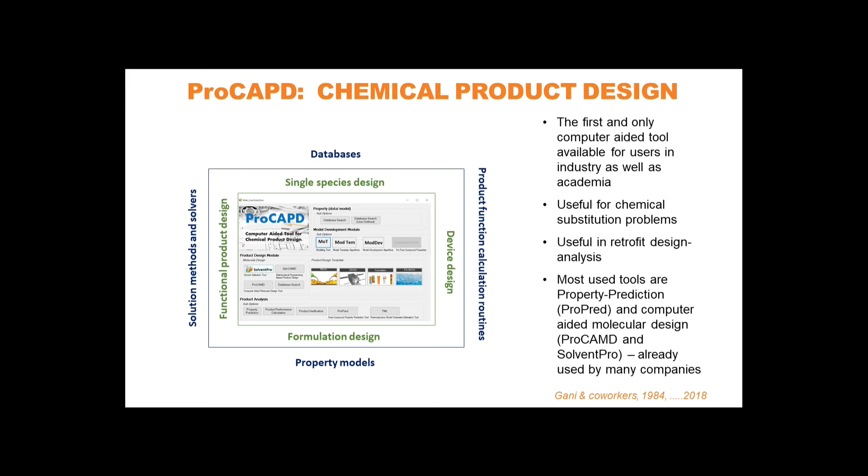Each of these solutions will require their own database, their own solution techniques, their own property models, and then their own functions. So if we make insect repellent and we spray it on our skin for mosquitoes, how do we know it works? We need models to check that also.

And then each of these will require the database to have different kinds of chemicals. Solution methods have different kinds of methods. Property models have different kinds of property models. And these are different performance models.

So evaporation rate is a very common one. If you spray the lotion on your skin, the objective of the solvent is to deliver the active ingredient on your skin and vaporize out, and that is the evaporation rate. If it vaporizes too fast, you will feel a little bit cold. And if it vaporizes too slow, it will be wet on your skin. So you can optimize that to make it perfect.

So like that, phase stability - it should not be solid or liquid on your skin. So these things can be checked, and the product can be optimized. So all of this can be done just like in process design, but here you do product design.

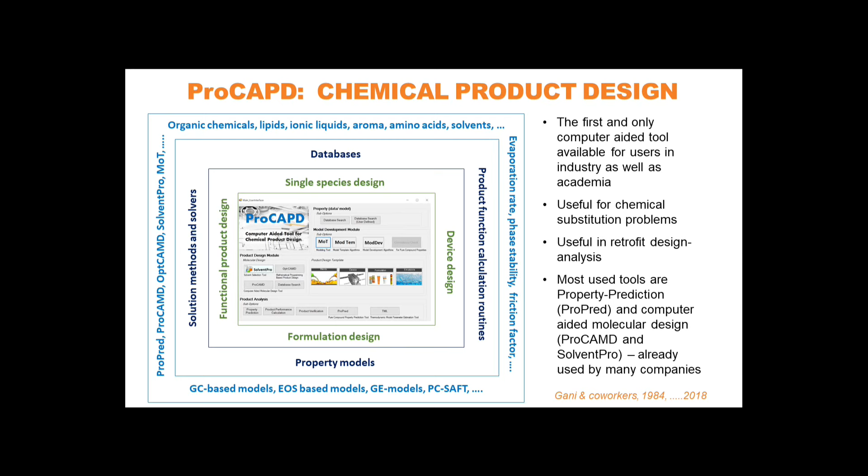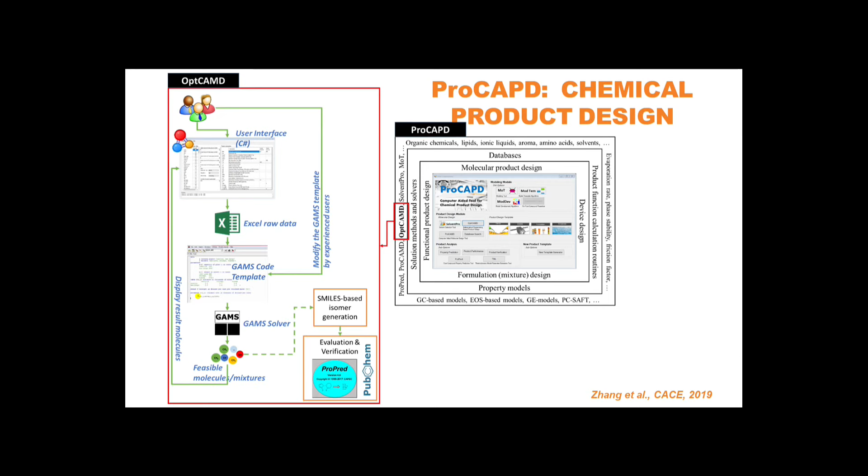And then you can also do optimization of the product design. Just like in Super-O, you write an optimization code to find the best processing route. Here you do an optimization code to find the best chemical formula or the best chemical molecular structure by optimization.

So I will not go into details, but it has been structured and done. So finally, we can see what kind of problems we have solved with these kinds of tools: commercial feasibility verification of any new processing idea. Companies can say, well, we are making this product, but we have seen in the market, if we can make chemical B, it will be quite good. How much will it cost, and will it be commercially feasible? So we can do this very fast and easy.

And we have done that for quite a few companies already. Retrofit - they have a process, but it's not working efficiently. So we go in, we do the design stage, identify what the problem is, and then we find innovative solutions. So these are different syntheses of new processing routes. These are very applicable now for the pharma industry, for biochemical, biorefinery.

Resolve operability issues - many industries have this problem. Provide reliable process simulation and analysis - many industries want that. At the same time, industries are also asking us to give them customized software tools. So we don't want to waste a lot of time trying to build new ones. We just take the components and put them together.

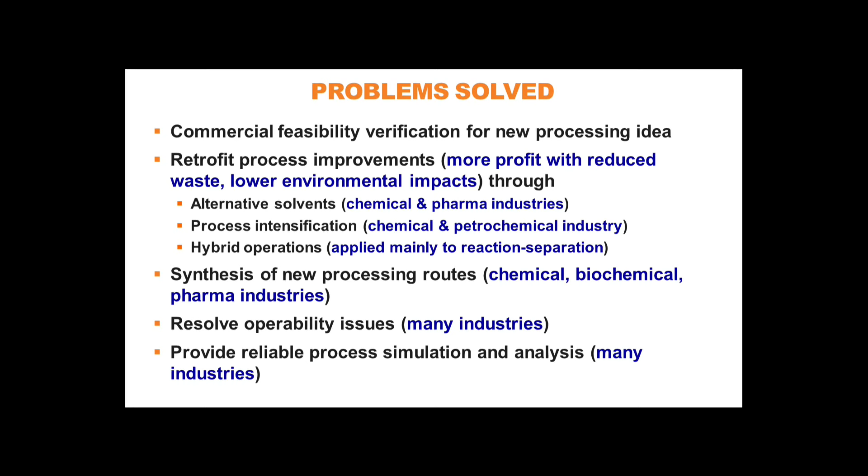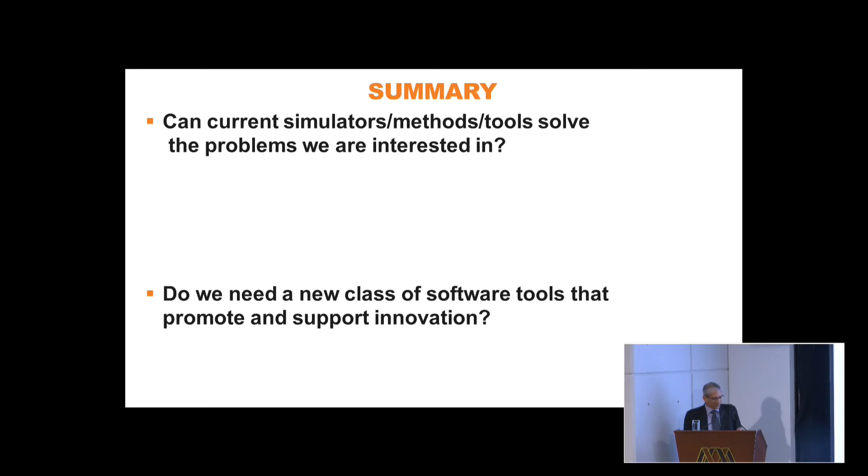So in the end, we have these questions. Can current simulators and methods solve the problems we are interested in? Do we need a new class of software tools? I think you can guess what my answer would be. Here it's no, because process simulators with unit operations - we can very quickly find out all the sequences, all the combinations, but that will never give us the innovative solution we want.

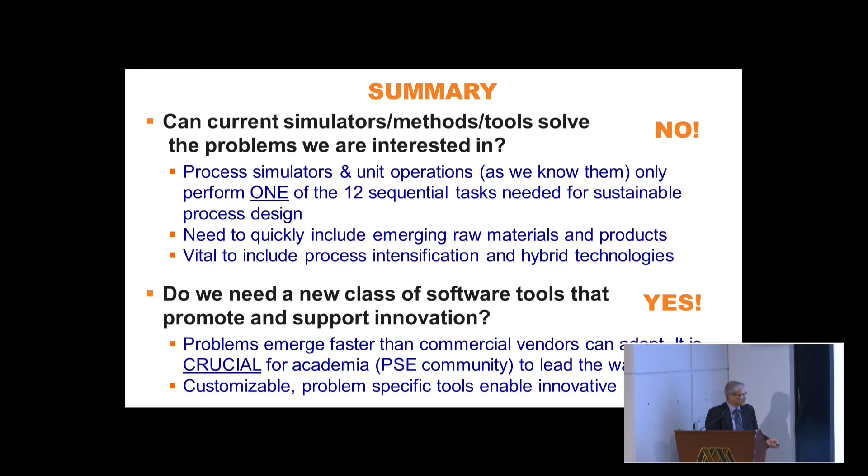We need to do this quickly and include emerging raw materials and products. It's vital to include process intensification and hybrid technologies, because they will give us the new innovative solutions we want. Do we need a new class of software? You can guess the answer. Problems emerge faster than commercial vendors can adapt. So we cannot wait for Aspen and PRO/II and others to include these things for us. They will only include it if there is a market for it. So it is important that...

Now I'm putting on the academic hat. When necessary I put on the industrial hat, and I say that these tools have to come from academia. Academia has to take the lead again, because where did Aspen come from? From MIT. Where did PRO/II come from? From one of the universities in California. HYSYS from Calgary, University of Calgary.

So they all came from academia. After that, we let them take over, and we did not develop anything further, so we just depended on them. But now we have to take over, we have to develop. And so this is also what I would say to all of you: you have to think about what new tools you can develop that can help solve the problems of the future.

Okay? And I would be happy to collaborate on this. I think you need to make a network, not only this group here, but maybe the different campuses of UAM, and then maybe other countries. And together, if you develop these tools, then the commercial vendors will want to use them, but the industrial companies are already using them.

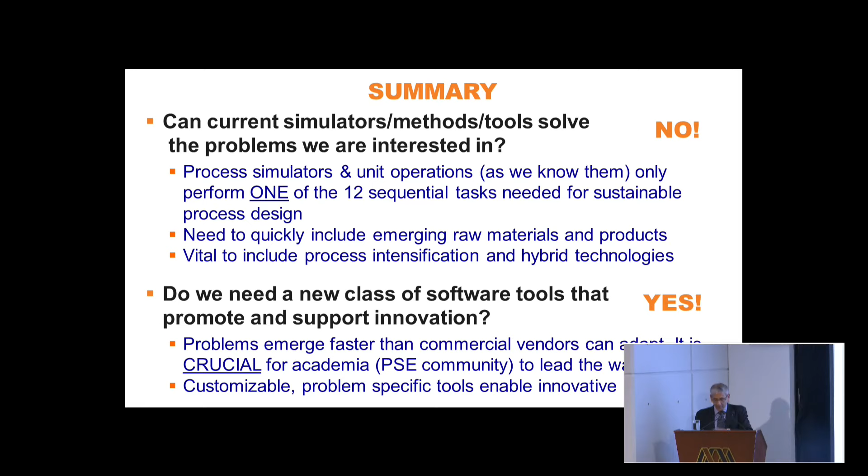Yes, thank you, Rafiq, for your presentation. I think I learned some new things that I was also thinking on how to do this innovation in computer-aided process engineering.

One more question: what is your opinion about the three-stage methodology you showed in the innovation methodology? You mentioned a reference about cost reduction or the impact on the environment, the waste. I think this is what we need from an industrial point of view. But nowadays there is a new concept, not really new, this circular economy, but I think it's more focused on the economy and the process. Can you say if this is related? What should be the advantage of using this kind of knowledge in process systems engineering?

Yes, this is a very good question, and I'm not a big fan of circular economy, and I can tell you why. I think in the financial sector that is a very good idea—money should be recirculated, it should not be kept somewhere, and the more money you circulate, the better.